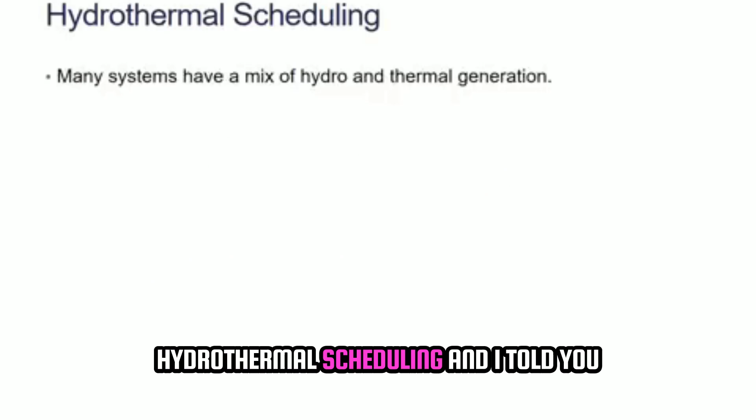So we discussed in the last class about hydrothermal scheduling, and I told you what exactly is the issue, why we want to separately handle hydro generators. So can anybody quickly tell me what all are the issues, or just share your thoughts? May not be all correct, but please try.

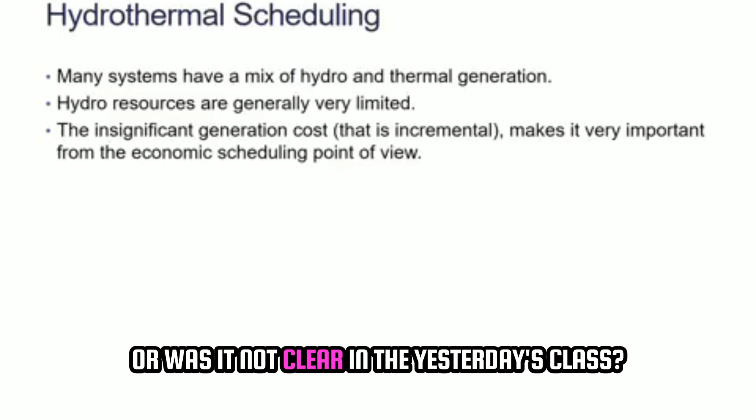Anyone? Let me just see who all are here today. Anyone? Or was it not clear in yesterday's class? Please just make a random attempt, don't worry if you're wrong. Like one of you said about ramping, it's okay, no problem.

Sir, from the point of economic view and also the limitation of hydrogeneration, for that reason we are going to use scheduling based on the limitations of hydro generators. I agree, your point is correct that there are some limitations, some additional factors which we have to consider, but what all are those factors?

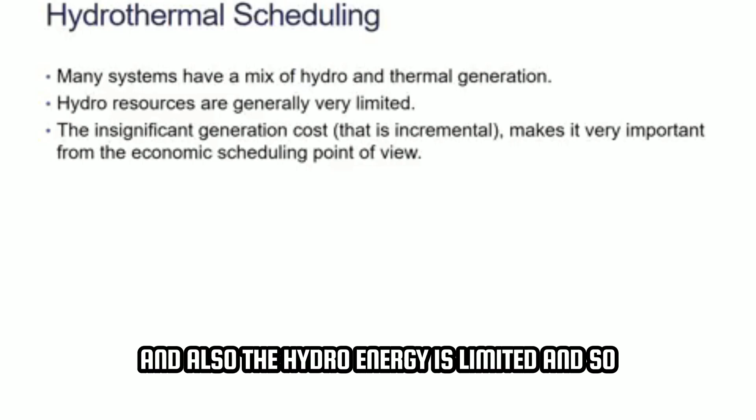Anyone? So the generation of a hydropower plant depends upon many factors such as the water available, and from season to season it also varies. All hydropower plants are not the same; they depend on their location and many other factors. Also, the hydro energy is limited, so you need to think about their coordination and everything.

Yes, partially yes, you are correct. So obviously all hydro generators are not identical, they depend on the location where installed. You can say two coal-based power plants of 500 megawatt capacity can be made identical if the technology is the same. But in hydro, you cannot make two identical power plants because there are multiple factors.

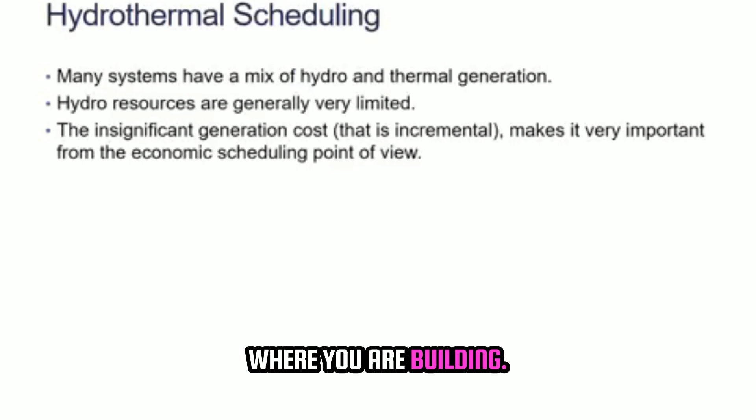One is basically the dam you are building, and all dams in the world have different water storage capabilities. Also, all dams are built on rivers, and all rivers have their own seasonal flow and seasonal volume of water changes based on season. So these factors are there.

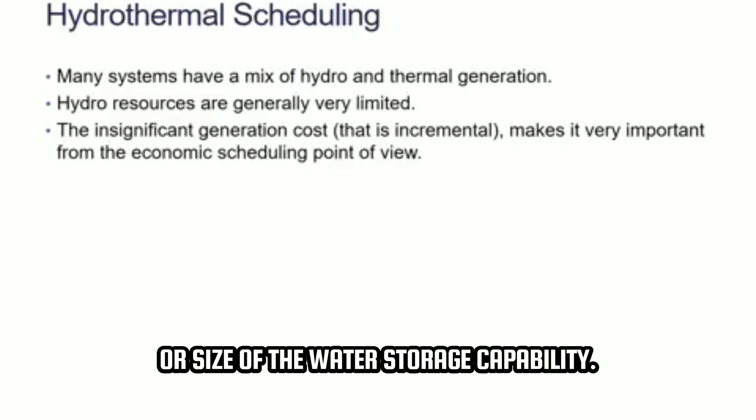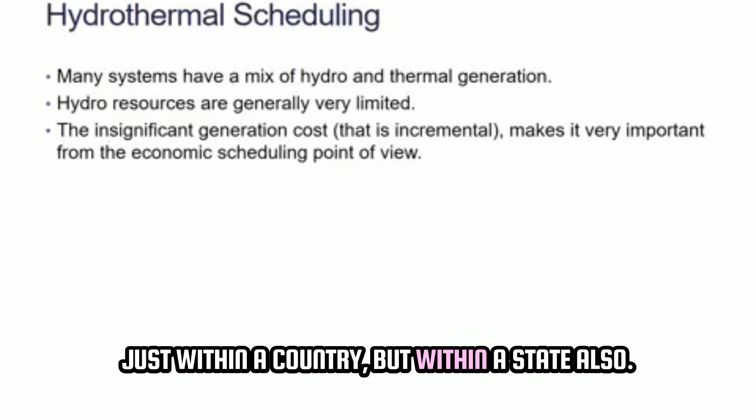Also, the size of the power plant you can build is limited by the size of the dam or water storage capability. It also depends on location because there are regulatory norms, since downstream of the dam there will be cities and agricultural lands needing water for day-to-day activity. Due to government regulations, not just within a country but within a state, a dam built in one state versus another will have different terms and conditions to ensure water supply for the downstream. They cannot block the complete river. So there are various norms because of which they are limited in how much they can generate and at what rate they can generate.

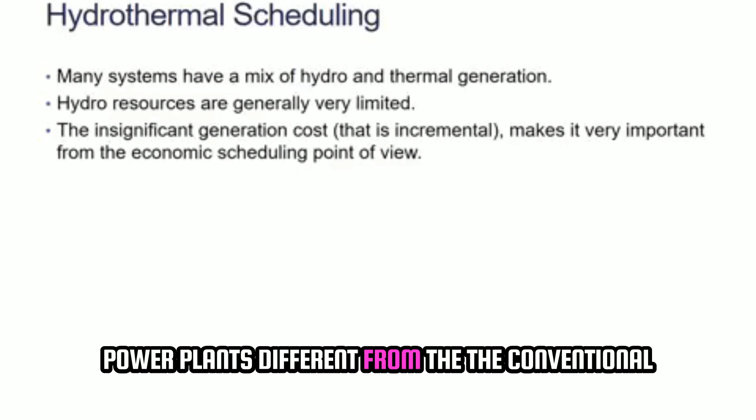So we saw that when a plant has a normal upstream storage, basically there's nothing else—water is coming in, natural storage builds up because of which the dam is filling up, and then you discharge the water and get power generation. This is the conventional way.

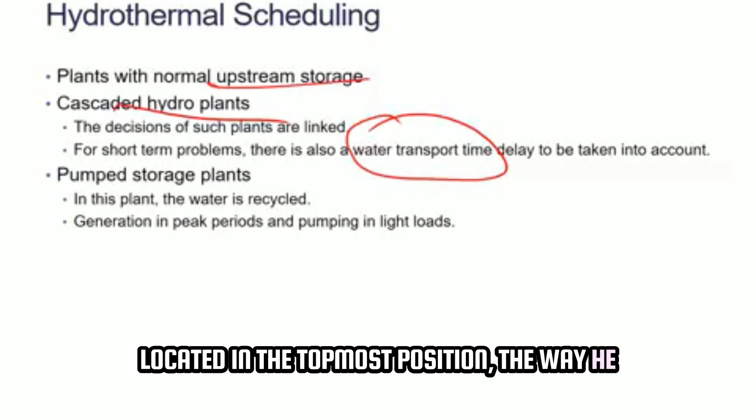Cascaded hydropower plants are there where you need to ensure water transport time delay, because cascaded means there can be a series of dams built on the same river in different locations. So basically, if the dam located in the topmost position releases water in a certain way, then only the dam located downstream can operate based on the operation of the previous dam.

So this connection is there, and it's taken care of by the water transport time delay. You need to ensure that if, let's say, two dams are built on the same river with a distance of 100 kilometers, once the upstream dam discharges the water, the water takes some time to reach the dam located downstream. This time delay also needs to be accounted for when talking about cascaded hydropower plants.

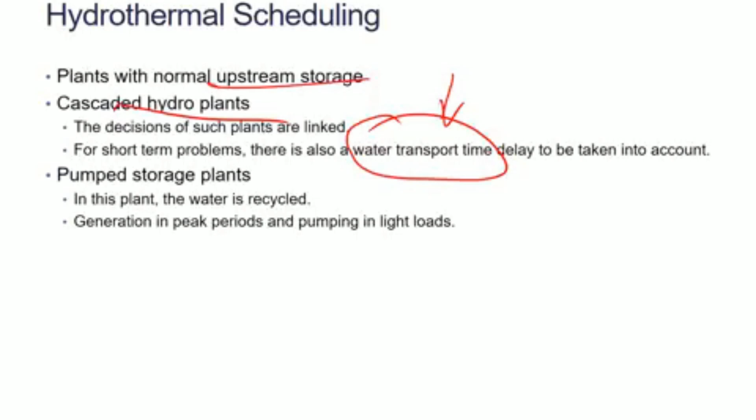And lastly, the pumped storage. Here we discussed that if you have a storage capability, what you can do is generate power when the power prices are very high or loading conditions are very high, then again pump back the water which you are discharging.

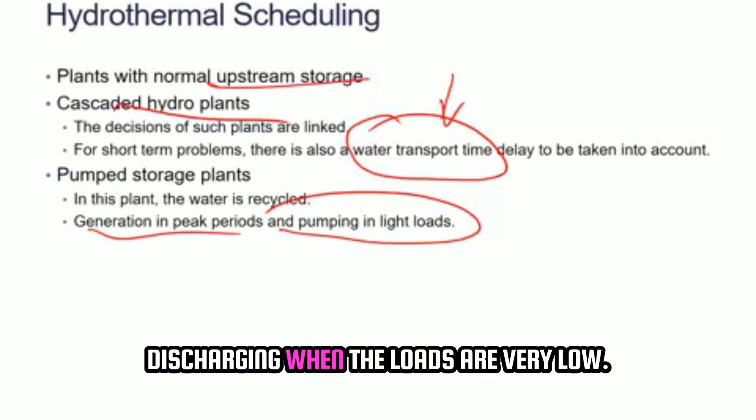When the loads are very low, the prices are very low, so you can pump back the water to the storage area and use it whenever the peak periods are there. So these features are there in some of the power plants—pumped storage plants.

These features make every hydropower plant different from each other, and these specific features need to be handled or taken care of separately in the optimization model or in the OPF. We have to add the constraints very carefully in the optimization model. So I hope now it is clear to everyone why hydro generators have to be handled separately.

Is there any question now? Is there any query now? Because many of you were unable to visualize this. Thanks to Nivedita for answering that.

I hope now it is clear why hydropower plants are handled separately.

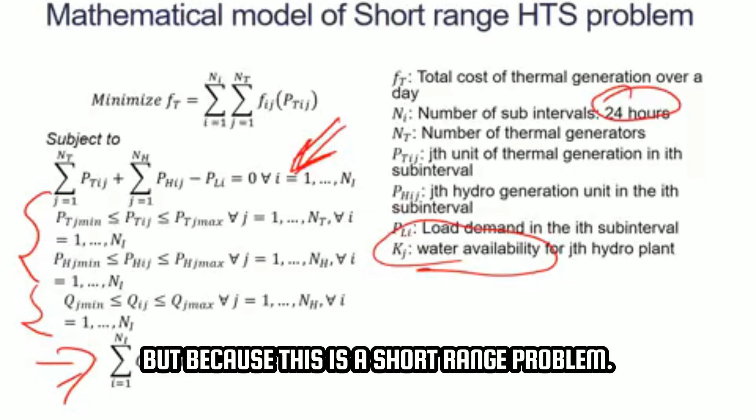Q is the water discharge, the maximum or minimum it can do at a particular time interval, and the total discharge should equal Kj. Kj is the total water available with the hydropower plant, which it can use for power generation for a day, because here we're calculating for a day—we have a 24-hour model, but this is a short range problem. If we're talking about long range, it would be a yearly model. Short range is generally an hourly, daily, or weekly problem.

Right now there is one equation missing here, which is that the discharge is actually equal to A plus B times pH plus C times pH squared. This is the discharge equation which connects these two equations, because obviously discharge can be—you can see here that power generation by hydropower plants can be any value, it is not connected with discharge. So this is the equation which is missing here.

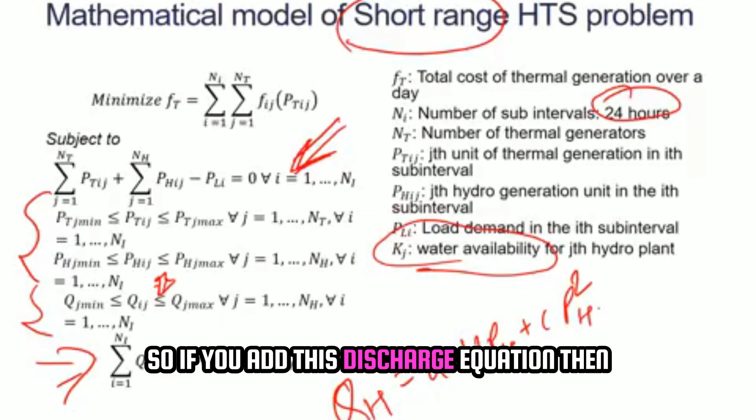So if you add this discharge equation, then you can connect it—the discharge is also limited, or the hydropower generation is also limited by the discharge limits. This is there, which I have discussed in the next slide, but I just wanted to give you an idea here.

So we talked about that for solving this we'll calculate a Lagrange function, and we know that Q is also a function of pH. So basically you can write it like this, that Q is a function of pH, right? Here we are assuming that it's a quadratic function, but it can be any other function. So that's why if we take the KKT conditions, or if we take the derivatives, you will also take the derivative of Q with respect to pH.

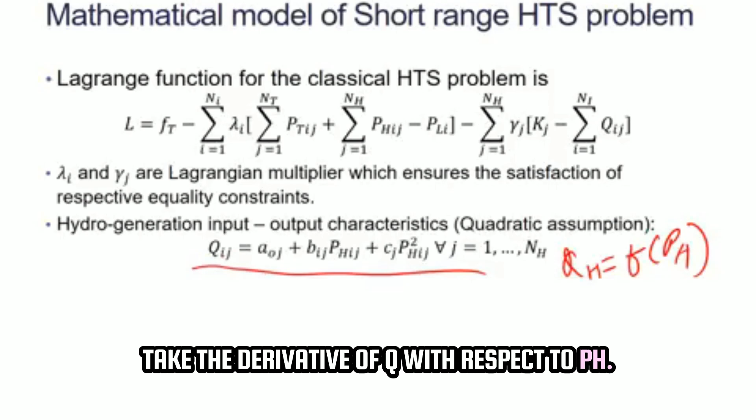Now here we also told earlier that this gamma j is nothing but the price for the volume of the water. So the rate of discharging the volume of water has a price. Although we say that the water does not have any price, from the mathematics you can easily calculate the price at which the water is being discharged. So you can calculate the price of water from here. Right, so this was the recap of the previous lecture.

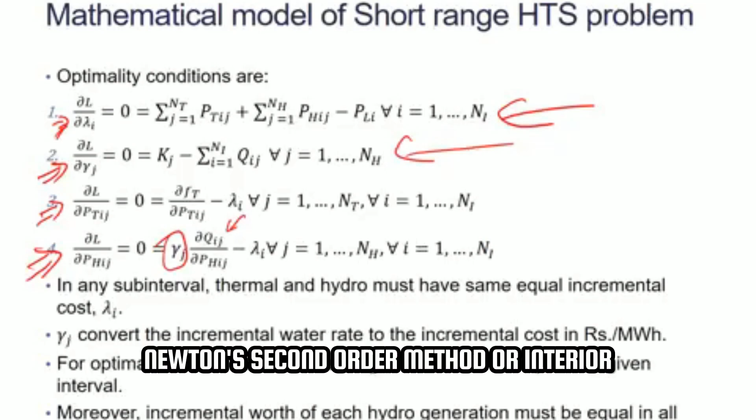Okay, good. If no queries, then we can go ahead. We have seen this type of problem. We can easily solve it using either the lambda iteration method, or Newton's first order method, Newton's second order method, or interior point method, because obviously it's a non-linear one. So you can use any method of your choice to solve this type of problem.

Right, so let me just give a small example for solving this problem using the lambda iteration method. Basically you can assume gamma j for all the hydro generators, and then once you know the gamma j values, you can easily calculate equations 1, 3 and 4. So 1 was corresponding to the power balance equation. So basically only gamma is the unknown compared to economic dispatch. So if you just assume the value of gamma, then the problem becomes similar to the economic dispatch problem.

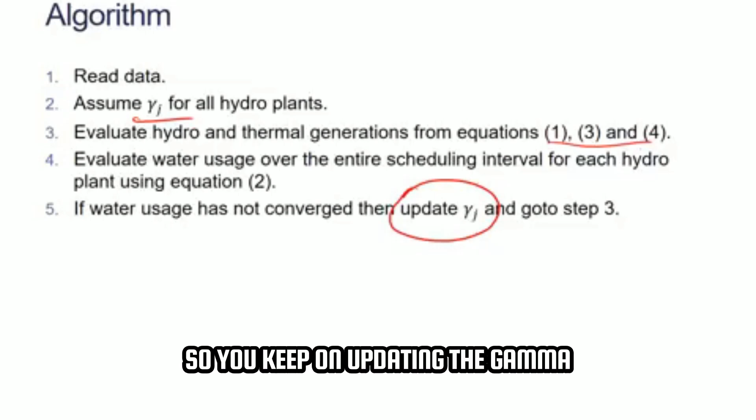So just assume the value of gamma, any random value, and then you can solve the economic dispatch type of problem. And then at the end you update the gamma as we did in Newton's first order method. So you keep on updating the gamma, and eventually it will converge and give you a global or a local optimal solution. Right, so this is what you can do. This is just one suggestion, but you can also solve using Newton's first order, Newton's second order, and interior point method. So you are free to choose those algorithms.

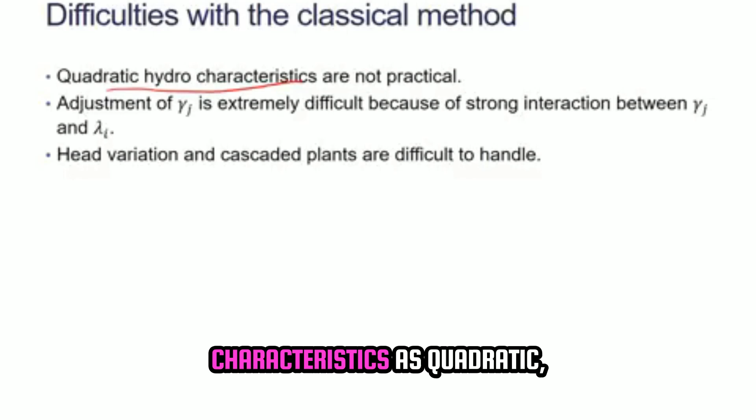Now, obviously, as I mentioned, there are 2-3 difficulties from the practical point of view. One is basically we are assuming the hydro characteristics, Q as a function of PH, as quadratic. As you have seen earlier, we cannot treat it as quadratic. There are a lot of factors which play an important role here. So this is not practical, but theoretically, or even in the industry or practical sense, people use some sort of assumption for estimating these characteristics of hydro plants.

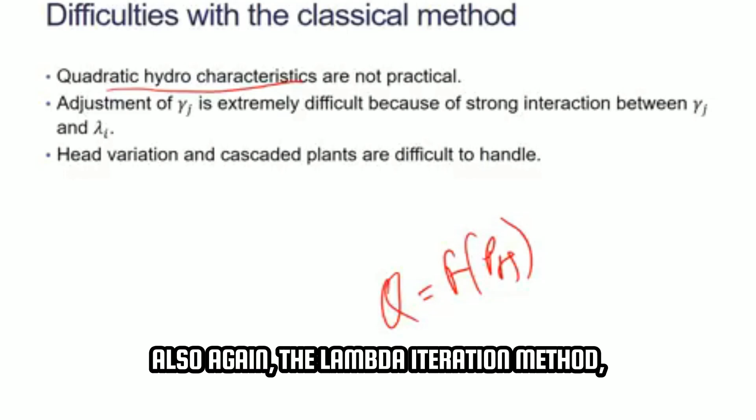Also, again, the lambda iteration method, which I told you before, in that the adjustment of gamma is extremely difficult. So it has a very strong interaction between gamma and lambda, and you cannot easily assume gamma and solve this problem.

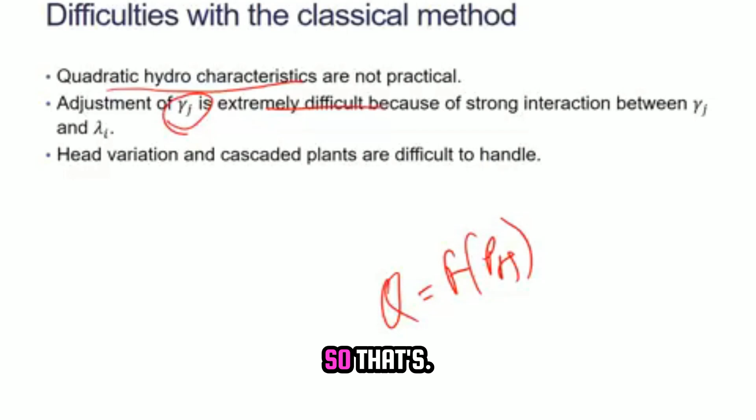So therefore I recommend everyone to please solve it using Newton's first order method or Newton's second order method or the interior point method. Those methods are much easier to solve compared to this lambda iteration method. Obviously in lambda iteration you will require more iterations to converge to a solution.

Also the last, which is very difficult to manage, is the head. You can see that the head is basically the water level at the dam, because based on the value of the head you will have enough potential energy which will be converted into kinetic energy, and the discharge flow of the water will be decided. So the speed of the water will be decided, which will eventually turn the turbine and generate power. So that head is very difficult to decide or predict.

In the case of cascaded plants, the judgment on the head of the dam becomes even more difficult. So there are various difficulties in hydropower plants. Therefore we were studying hydropower plants separately from conventional power plants.

Now I'll give you a quick background on how system operators practically run hydropower plants. The q equation and the discharge equation, that sum of q should be equal to kj, these two equations are not considered by the system operator. I'm just giving you an idea of what exactly a system operator does.

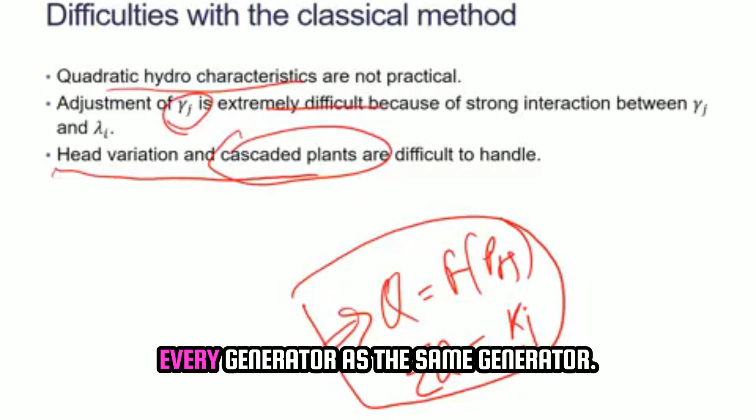They treat all the generators, hydro, thermal, diesel, gas, nuclear, every generator as the same generator. They do not differentiate between them. They collect the bids, similar to what you were seeing in economic dispatch where different generators were giving their bids. So here also they only ask the hydro generator what is the quantum.

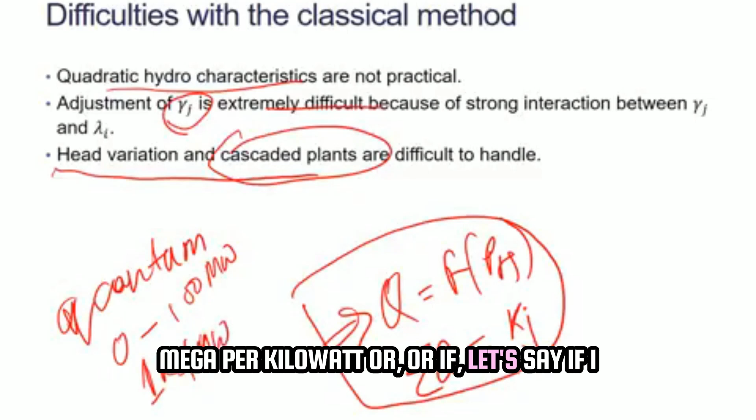Let's say it's a 100 megawatt power plant, so they can say they can generate between 0 to 100 megawatt at, let's say, 1 rupee per kilowatt, or 1000 rupees per megawatt. So these hydro generators are also told to give similar bids, like all the generators in the power system: what range of power they are interested in generating, and at what price. This is decided by individual generators.

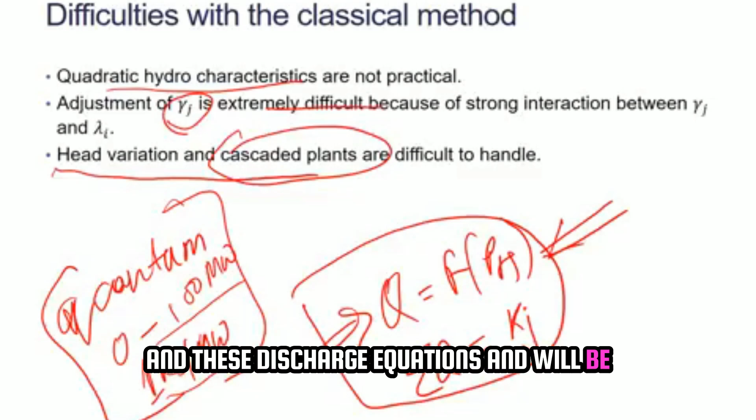Hydro generators provide this information to the system operator, and the discharge equations will be taken care of by the hydro plants themselves. They will ensure these constraints are satisfied. So if a system operator tells them to generate 80 megawatt, the hydropower plants will ensure that their discharge is enough to take care of all these parameters. You got the idea, right?

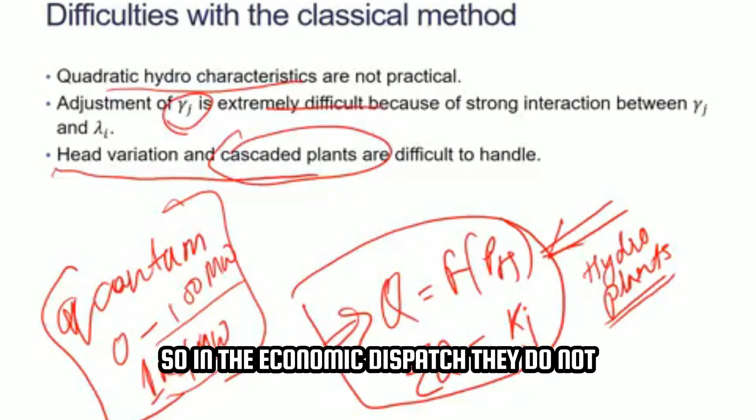So in economic dispatch they do not include these discharge equations at the system operator level, but those equations are included at the power plant level, and the hydropower plant just tells the system operator that they are interested in selling this range of power at this price.

So I hope you got the connection to the practical operational aspect of hydropower plants. It is much simpler in practice, but theoretically much more difficult. That's why they have simplified it in the practical situation. Any queries as of now?

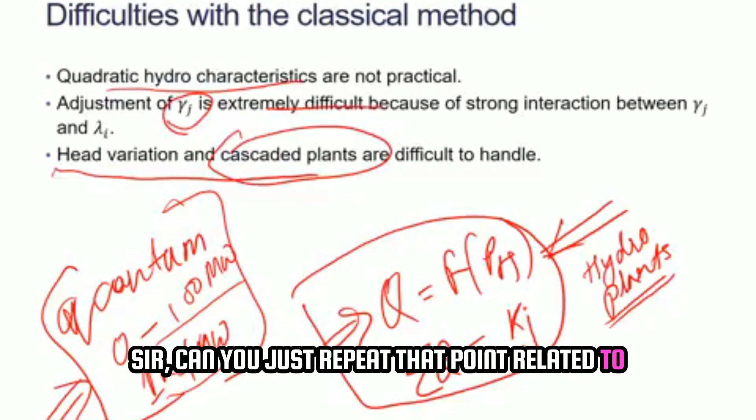Sir, can you just repeat that point related to the price and the megawatt? This quantum one? Yes, exactly. Okay, so basically, whenever a system operator, or let's say in the market, we are going to see that course in detail in the next semester, but just for your understanding, there is a system operator. I'm just going to explain it in a much simpler way.

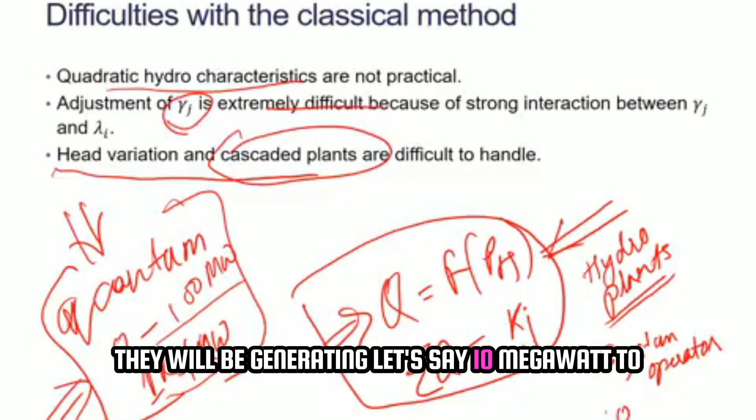So there is a system operator which actually collects all the bids. All the generators, either hydro, thermal, nuclear, gas, diesel, submit a bid to the system operator where they say that they will be generating, let's say, 10 megawatt to 50 megawatt. They can give any value. It is decided by the power plants, and they can say that I'll be generating between 10 to 50 megawatt at, let's say, 0.5 rupees per megawatt, or it will be in kilowatts, but you can convert.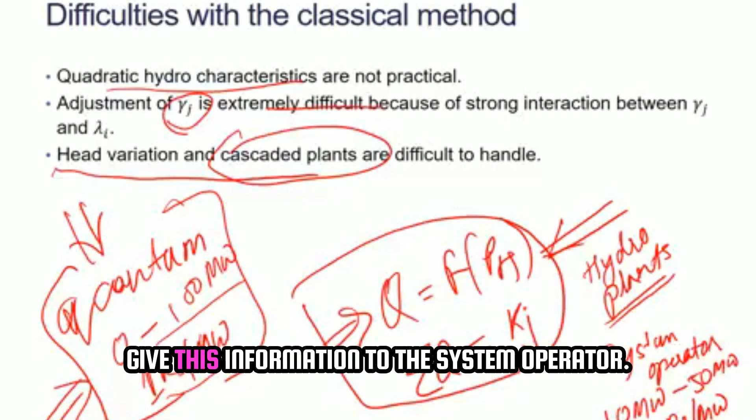Let's make it simpler. I'll convert it and then tell you. So it will be, let's say, 500 rupees per megawatt. So I just multiplied it by 1000, right? So all the generators across the world, in every system operator, in every country, give this information to the system operator: what is the range of power they are interested in generating, and what is the price at which they are interested in selling that power. Based on this, the system operator finds the optimal solution, right?

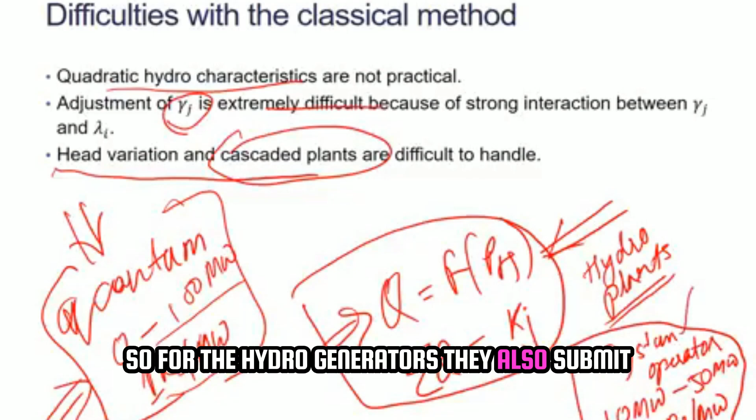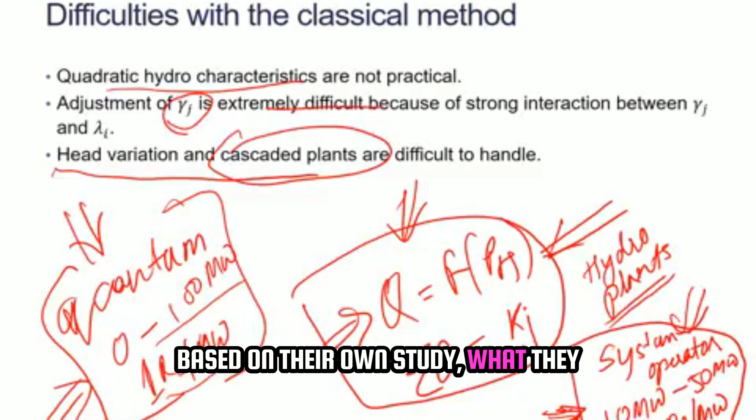So the hydro generators also submit the same information to the system operator, and these discharge related equations are taken care of by the hydropower plants themselves. Hydropower plants do not give the discharge information to the system operator. They do their own study and analysis at the power plant level, find out how much power they can generate at a particular time interval, and tell the system operator: okay, we can generate this much power, based on their own study of the discharge and the water availability.

So the system operator just gets the information about the range of power generation and the price at which they want to sell this power. Right? Is it clear, Adam? Yes, sir. Good, good. Any more queries here?

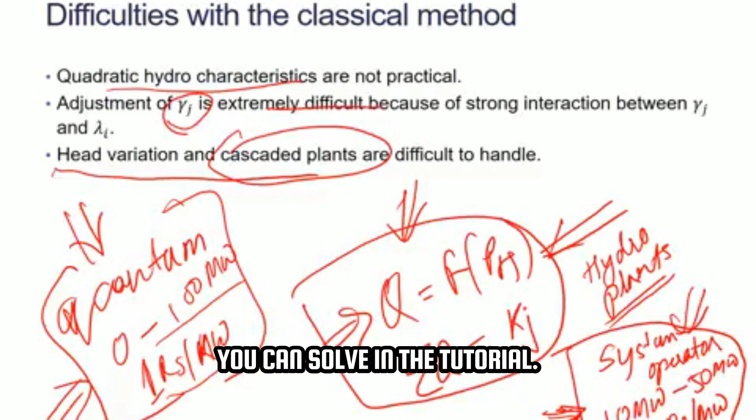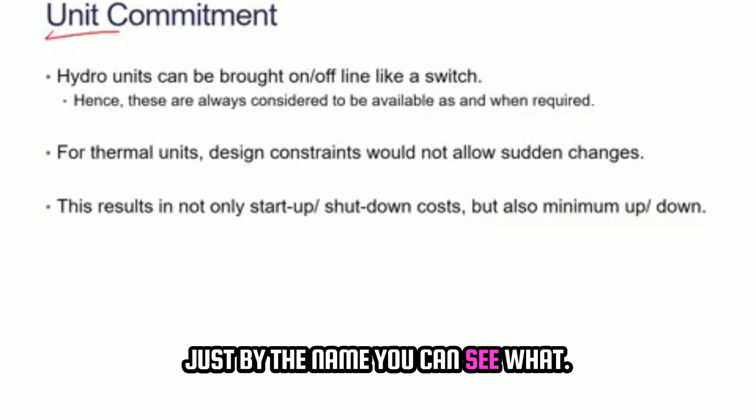Okay, so the new topic we are starting is unit commitment. So anybody has idea on this, or just by the name, what do you understand just by the name unit commitment? Whether the unit will be generating or not. Yes, exactly. It's correct. So just by the name you can see that commitment is there. So commitment of a unit.

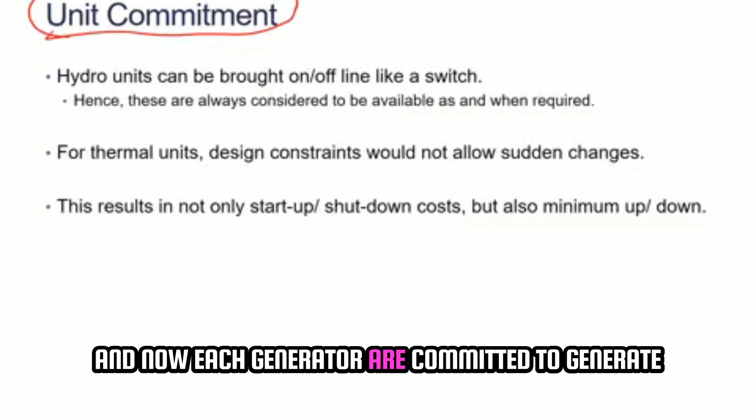A unit means basically in power plant, every generator is a unit. Unit, matlab, in a simple sense, it's a generator, and now each generator is committed to generate a particular value at a particular time interval. So to simply say, you have to tell a generator when to switch on and when to switch off, and when to generate, when not to generate, right?

Now the question will be, why is it different from economic dispatch? Obviously on and off we can do also in the economic dispatch. Why are we studying this unit commitment separately? We can just add the on and off constraints and that can be satisfied in the economic dispatch. Why are we studying separately?

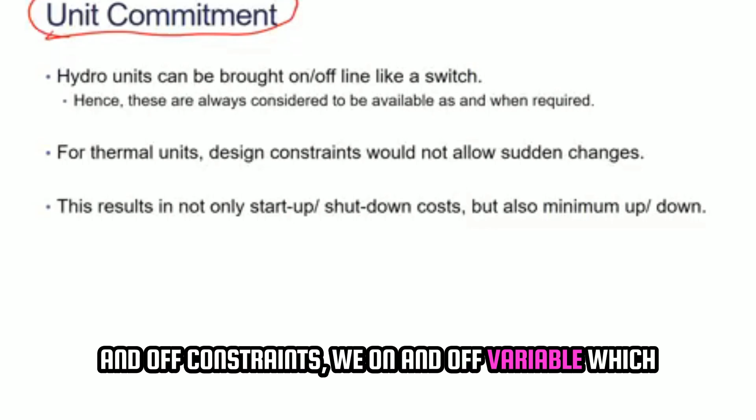So to know the availability of the generation. Okay, availability is fine. Availability, yes, based on the on and off variable which ensures that the generator will be on or off, we can definitely know the availability also, but what else? For forecasting. Forecasting, no, not exactly. We actually assume all the data here. So we assume that we got the data from the forecasting. Is there any limit on the?

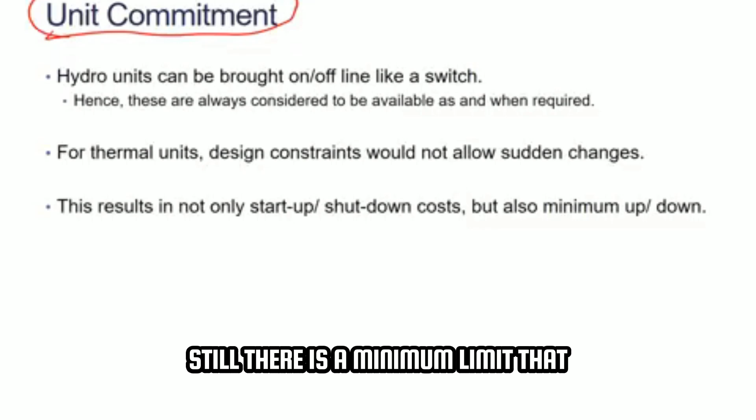Sorry, come again. There's a minimum limit on generation. Minimum limit of what? Sir, on each generating unit, if it's not optimal for us to operate that generating unit at all, still there is a minimum limit, that this amount of megawatt we have to dispatch. Okay. Again, this is all about on and off. I agree on and off is there.

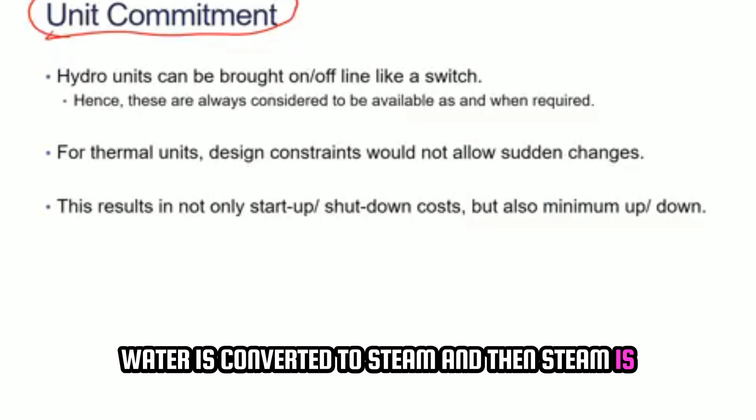Okay, so let me just again explain you this from a practical viewpoint. Take a coal-based power plant, right? So let's assume you have a coal-based power plant, and basically you burn the coal first, then you boil the water, and then water is converted to steam, and then steam is forced into the turbine, and the rotation of the turbine rotates the rotor of the generator and eventually generates the power, right? So this is the complete process of power generation.

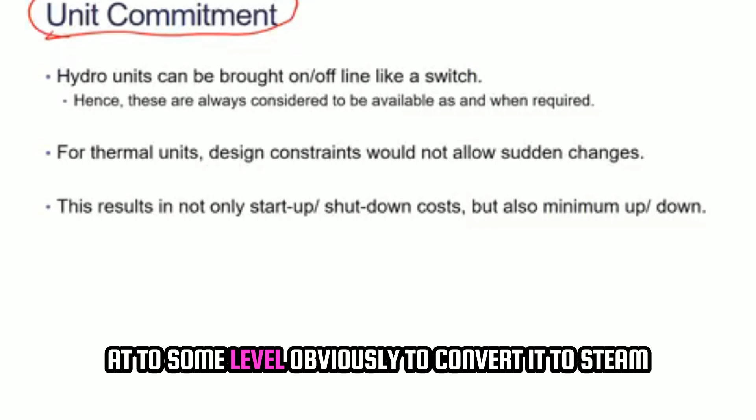Now basically the idea here is that the generator rotating is the extreme end or the last step. Before that, let's assume that the water is at the room temperature or at the normal temperature. So first you have to burn the coal, and then you have to boil the water to some level, obviously, to convert it into steam, and then you start generating power. So once it converts to steam, then obviously you immediately start generating power.

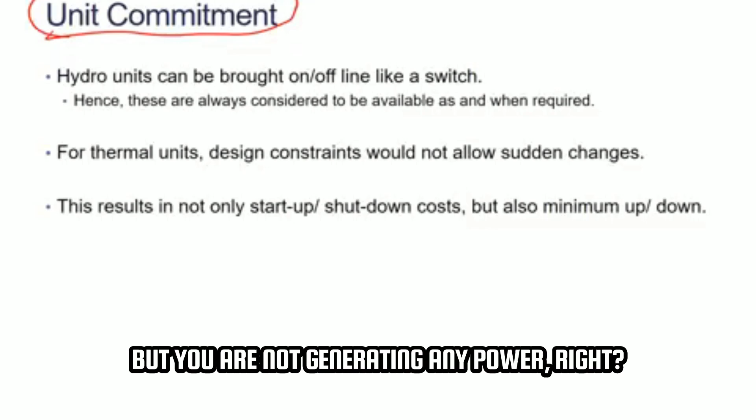Now the question is, during this process where you are boiling the water and converting to the steam, you are still burning some coal, but you are not generating any power, right? So basically, power generation is a business, think in terms of a business. All the power generators are owned by private companies or government companies. They are all running for profits, right? So if there is some raw material which is burning and you are using that raw material, who will pay for that raw material?

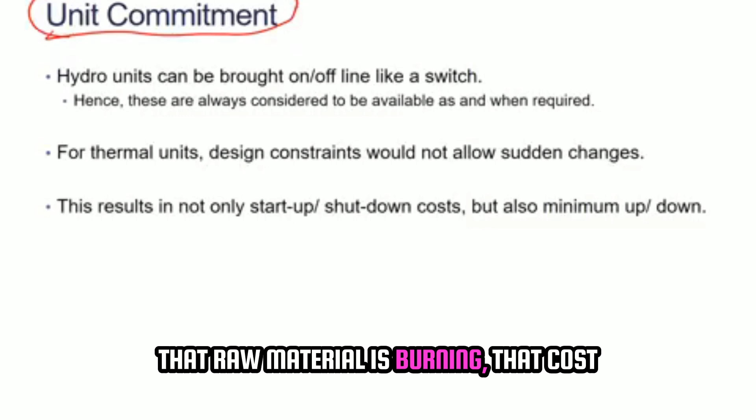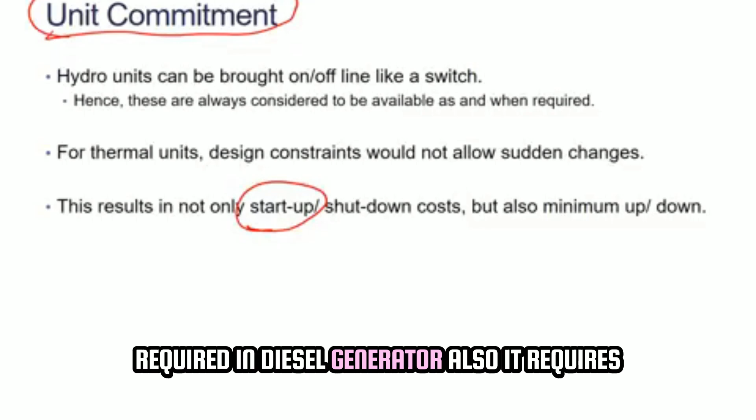Right? So if that raw material is burning, the power plants also require that cost to be recovered, and we have not discussed about that cost in the economic dispatch or in hydrothermal scheduling or in OPF. So in unit commitment, we will be actually considering these startup costs. This type of cost is required in nuclear generators also, in diesel generators, in gas generators, in all the generators except hydro; some startup cost is there in the power plants, right? I'm not sure if you know this or not.

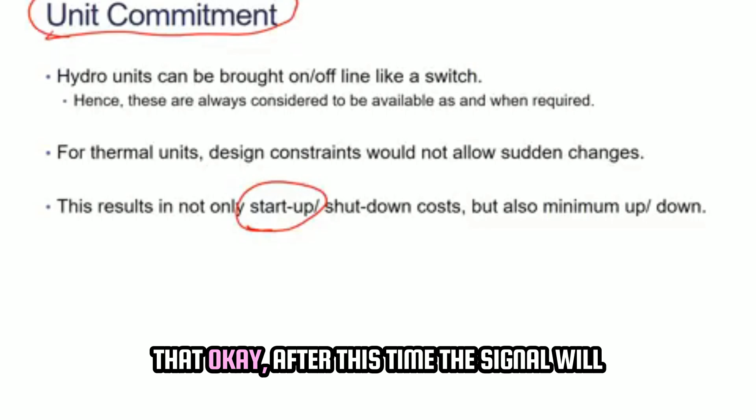Let's say you have two-wheelers. I assume that everybody has a two-wheeler or four-wheeler vehicle. You must have observed or heard the car manufacturers or two-wheeler manufacturers saying that if you're going and you are stopping at a traffic light, and generally these days at traffic lights you will see a countdown timer which tells you that after this time the signal will become green from red, right?

So you must have heard different manufacturers saying that if the time of that traffic light is less than 10 seconds or 15 seconds, then you do not need to switch off your car or your two-wheeler. You can keep it on and just remain 10-15 seconds at stop, and then as soon as it converts to green you can immediately start

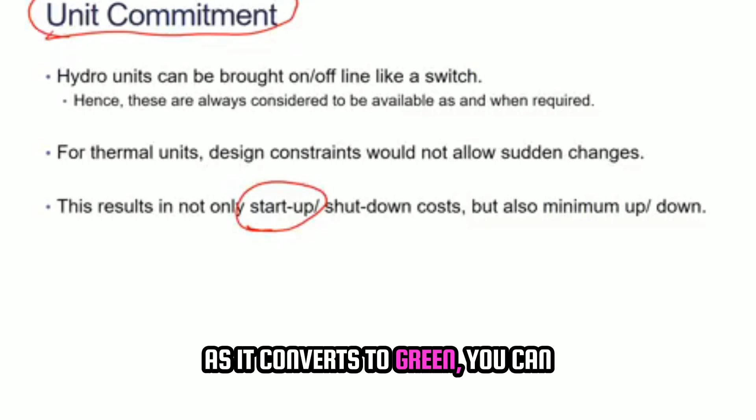running your vehicle. But if the time is more than, let's say, 20 seconds or 25 seconds or 30 seconds, then they say that now you can switch off your vehicle, wait till the time comes to 0, and then switch on and again start running your vehicle. So why are they saying this? Has anybody observed this, or heard this type of sentence before?

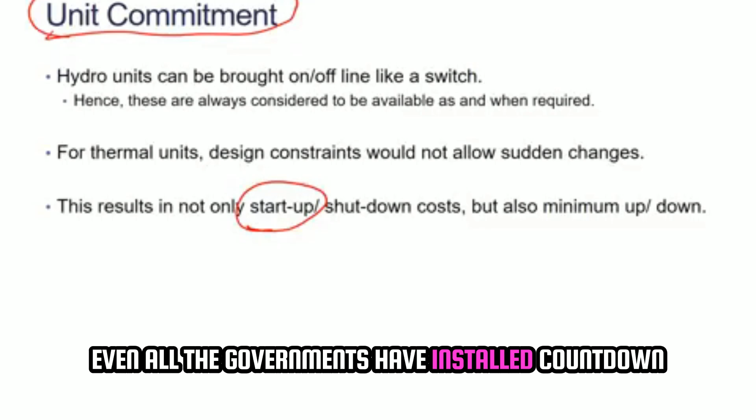Yeah, good. So that was the main reason why all the governments have installed a countdown timer at the traffic signals, because this is the way you can save fuel, as well as save from pollution. Because once you start your vehicle, either a four-wheeler or a two-wheeler, immediately it requires a larger volume of oil than if it is continuously in the on state. So there's a difference between that.

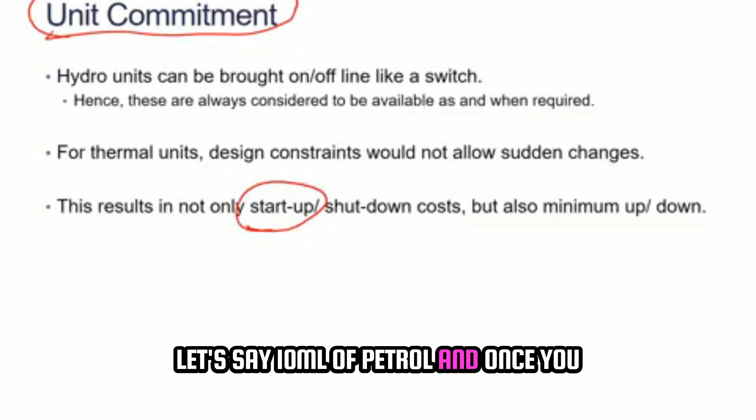So once you switch it on, it might require, let's say, 10 ml of petrol, and once you are continuously running it, it might just require 1 ml for every 10 or 20 seconds. So that is a trade-off. If the traffic light is less than 15 seconds, you can keep it on, but if it is more than 15 seconds, you can switch off and wait for the signal to convert to green, and then you can start. So that is the trade-off.

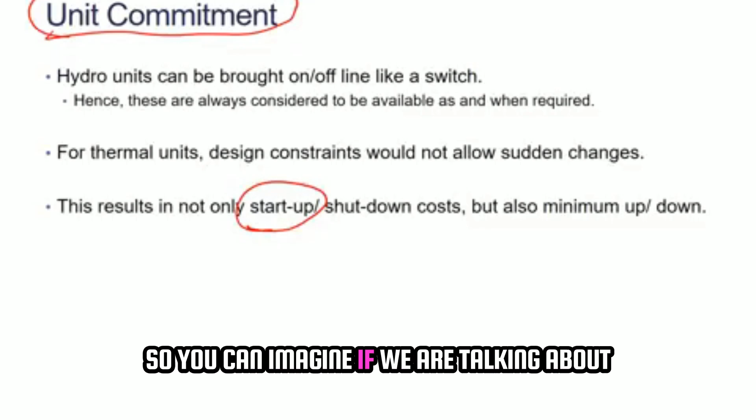So therefore, in the diesel-based generators, even in the gas-based generators, there is some sort of startup consumption, because those generators are of big capacities, huge generators. If we are talking about this small volume for a two-wheeler and four-wheeler, you can imagine the size of thermal generators or the diesel or gas-based generators, and the amount of startup cost they have to face.

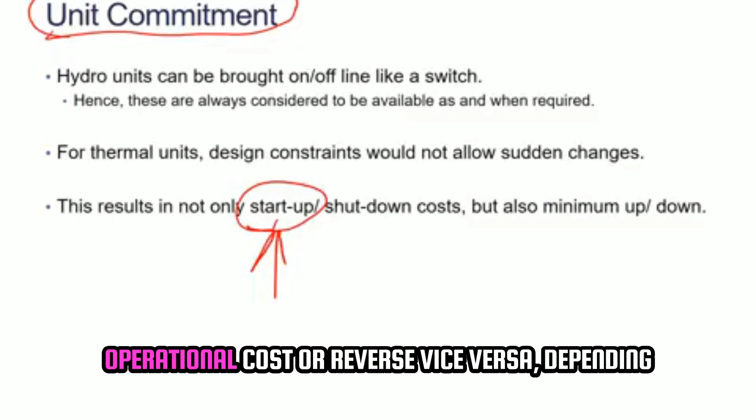So these are the startup costs which are additional in the unit commitment, which we have not discussed earlier. So this is the new thing we are going to discuss, and the optimization will ensure that if the startup cost of a generator is higher and the operational cost is less, it will encourage a generator with a low startup cost and higher operational cost, or vice versa, depending on the situation of the system. So these factors have to be taken care of.

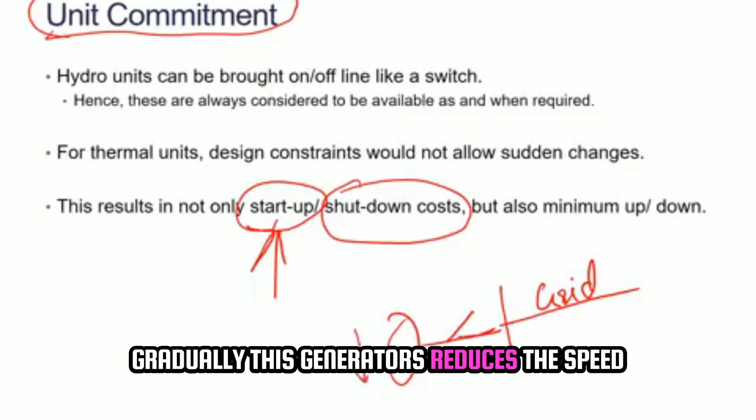Also, once we are talking about the startup cost, there will also be a shutdown cost. Shutdown means a generator is synchronized with the grid, and as soon as we tell the generator to shut down, you just have to desynchronize the generator. If the generator is here and the grid is here, you just have to open this switch, right? Then gradually the generator reduces the speed of the rotor and the turbine.

If it's a coal-based power plant, you can stop burning the coal, but because of the high pressure and high temperature, you cannot immediately stop burning the coal. So there is a whole process where you gradually start reducing the burning of the coal, and then gradually the temperature in the boiler starts reducing. So there's a whole process required in the background once you tell a generator to switch off.

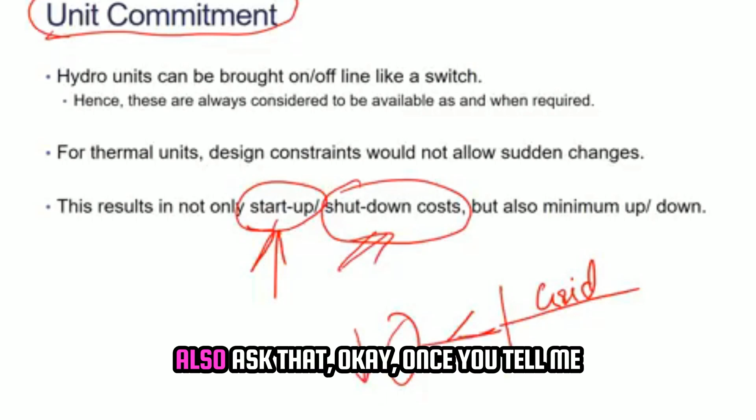Those processes also require some costs, and therefore these generators also ask that once you tell me to shut down, you need to pay me an additional cost, which is a shutdown cost. This is being paid to all the generators, whatever they have asked for.

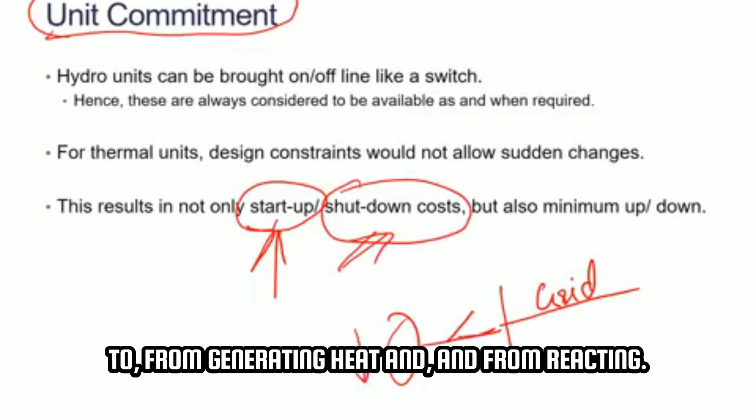You can especially visualize this from nuclear generators. Whenever you tell a nuclear generator to shut down, you have to do a lot of process, because it's a radioactive material, it's a dangerous thing. So there's a lot of precaution, and with a lot of caution, they do a process which will ensure to stop the nuclear reactor from generating heat and from reacting. It's a very careful process which people have to take care of to ensure that you shut down the generator. So these factors are also there, which we are going to discuss in unit commitment.

Also, there is minimum uptime and downtime constraints. These are the time intervals, basically the minimum up and down time.

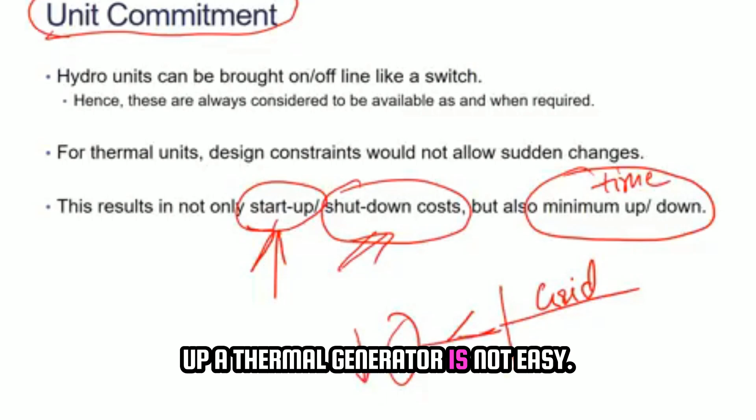What this means is, obviously, this startup cost or the process of starting up a thermal generator is not easy. Let's say, taking you back to the four-wheeler or two-wheeler logic, if you switch on your four-wheeler and go just 100 meters, and then again switch off your vehicle and switch it on again, then it becomes even more uneconomical or inefficient usage of that vehicle, right?

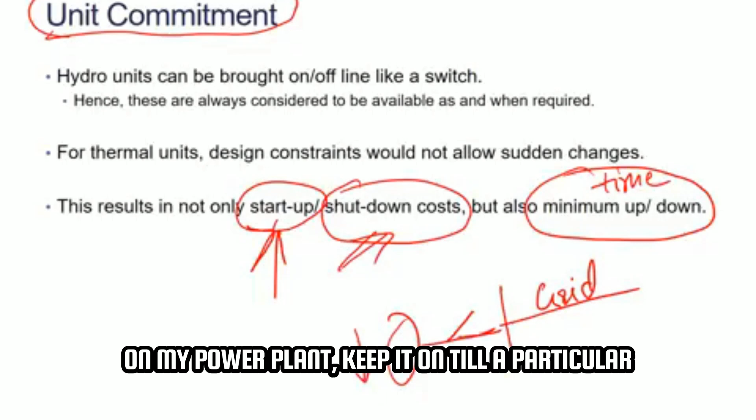So in the same logic, in power plants, they also say that once you switch on my power plant, keep it on till a particular time interval, you cannot tell me to switch off. Generally from the thermal or coal based power plant point of view, they say that if you switch on my generator, keep me switched on for, let's say, 3 hours. So if right now it is 12 p.m. and I switch on that thermal or coal based generator, you can switch me on, but you cannot tell me to switch off till 3 p.m. These type of constraints make the operation of that power plant efficient.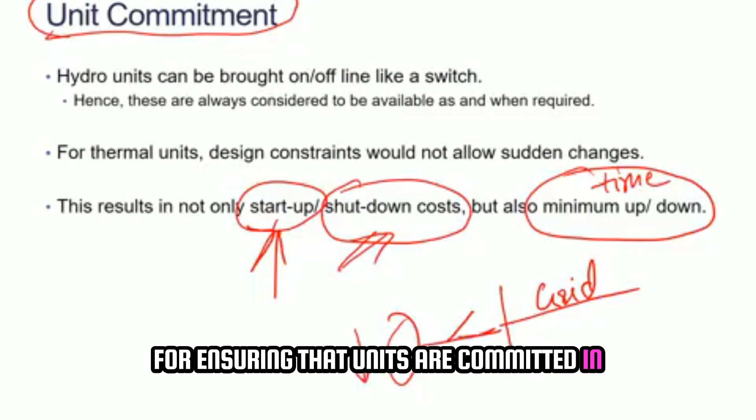These operations or constraints are additionally considered in unit commitment for ensuring that units are committed in an efficient and economical manner. So these time constraints are additionally there, which is called minimum uptime.

Minimum uptime is basically: once you wake me up, keep me awake till this particular time interval, that is minimum uptime. Down is basically you are again going to sleep. So once I sleep, or once you shut down my generator, keep me shut down till this interval. So both constraints are there, up and down, and each has its own requirement. Every power plant has its own requirement on downtime and uptime.

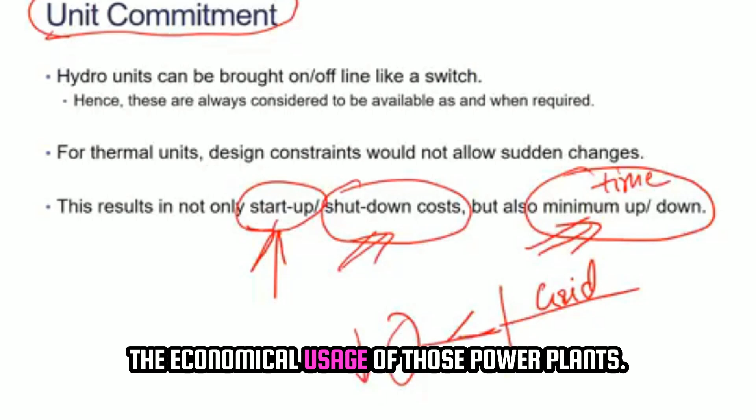The system operator has to ensure this minimum uptime and downtime for the efficient as well as economical usage of those power plants. Otherwise, power plants will face losses. Obviously, as a system operator, he will not face anything.

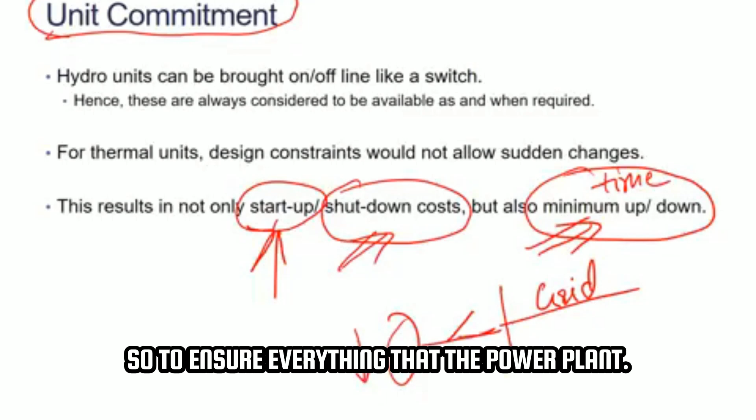Also, in this switching on and off process, there are a lot of switches, pumps, and various knobs in the power plant which you have to control. If you often change all those settings, it creates wear and tear at various levels, and it requires maintenance, or often maintenance will be required for those power plants if you tell them often to switch on and off.

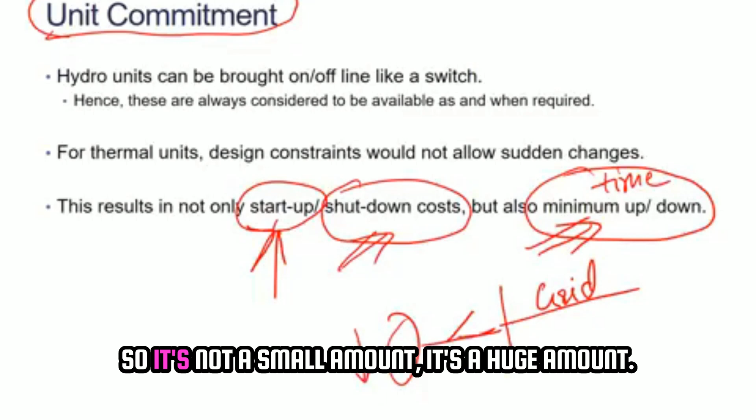To ensure everything works, let me give you a quick example. If you call for maintenance for a power plant, generally for an hour, the power plant loses approximately 10 to 15 lakh rupees just for going on maintenance. So it's not a small amount, it's a huge loss for a power plant owner or businessman running that power plant. Therefore, they have to ensure those factors so that they can run efficiently and economically.

So with this basic startup background of unit commitment, let us see that on Monday. I'll not go ahead because it's already 12 p.m. But I hope you got the basic idea why we are going for unit commitment, and once you start the generator, everything is the same as economic dispatch, DCOPF, or ACOPF. Everything comes after that. First you have to switch on the generator to include it in economic dispatch, DCOPF, or ACOPF.

Right, so this we are going to see in the next class, and we'll see the mathematics of it, how to solve it. There are a lot of different methods to solve this, so let us see all those in the next class on Monday.

Okay, any queries? Yes, sir. Am I audible? Yeah, I can hear you.

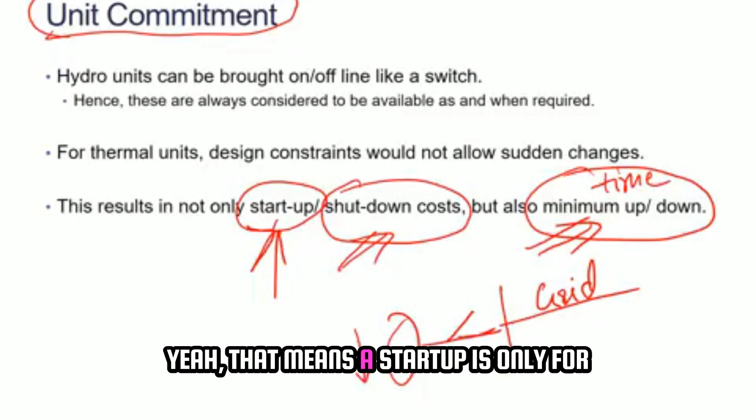I want to ask about startup. It just means a startup is only for load light, or what is called at night. We know that the load will be light, so at that time I don't need to shut down the generators. So I think a startup is only for this period, or there are other cases for that.

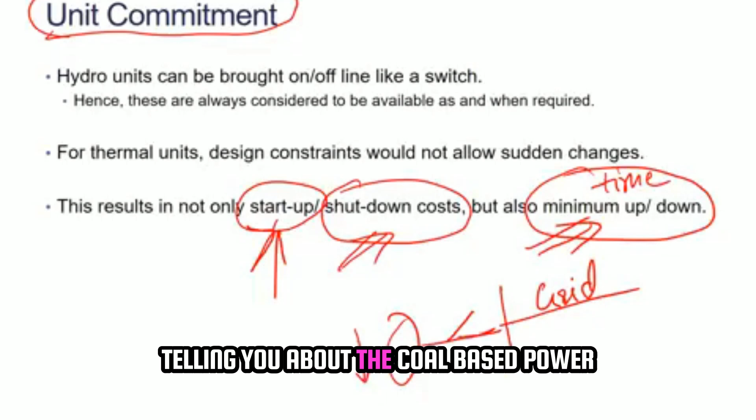No, startup can be at any time interval. Startup cost is not related anywhere to the load. It is not a matter of the load, it is a matter of the generator. So if a generator is requested by the system operator to switch on, then that generator will have to do all the process which I was telling you about for the coal based power plant: you have to burn the coal, you have to boil the water, and then at a particular temperature you start injecting the steam, and once you start injecting the steam, then only the rotor starts rotating and generates power. So this process can actually happen at any time interval of the day. There is no specific time where I can tell you that okay, this time it will happen.

That process involves some cost, and that cost has to be taken care of as a startup cost while starting up, and then the system operator has to pay that cost to these generators. But it can happen at any time interval.

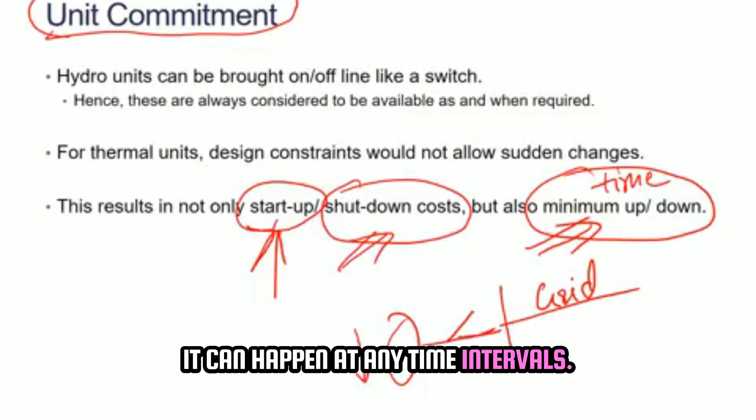Right? Okay, we are going to discuss this in detail in coming up classes.

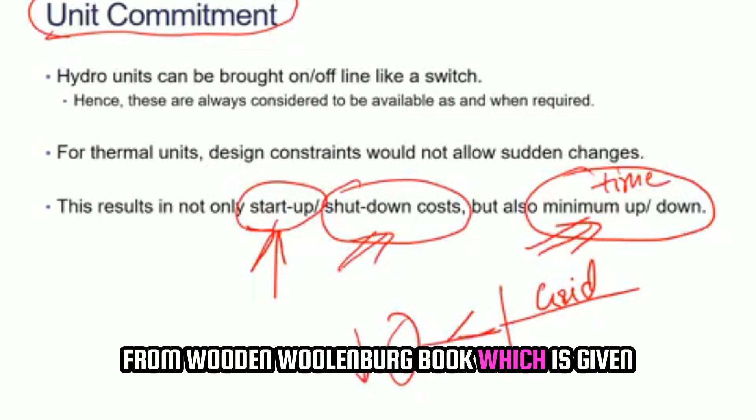Okay sir. You can also read in Wood and Wollenberg book. There are a lot of examples of unit commitment and basic understanding given there. Most of the material I'm taking is all from Wood and Wollenberg book, which is given in your curriculum as a reference. That is the book which I am following the most for all the lectures.

Okay, any more queries? Yeah, I have a question. Yeah, please. Yeah, it's related to generators.

When we are at night and the load will be light, why don't we shut down the generators and start it again? Yeah, no, yeah, you are right.

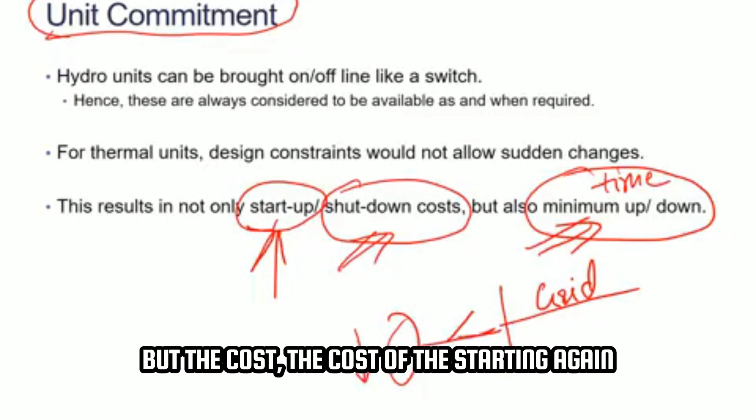Actually, we shut down the generators at night, because obviously at night the loads are very low, because we switch off all the lights. Mostly all the commercial buildings are switched off, all the offices are closed, so most of the loads are off. So obviously at night time the load is very less, but the cost of starting again is more, because the generator needs maybe 3 or 4 hours to start again.

So what they do basically, let's say if the generator has to generate from 7 a.m., let's assume from 7 a.m. he has to start generating. So what he will do is that the system operator will inform the generator at 4 a.m. probably that okay, you have to start generating at 7 a.m., so start preparing the process. So everything is informed to the generator ahead in advance, and they can take those actions. So there is no problem as such.

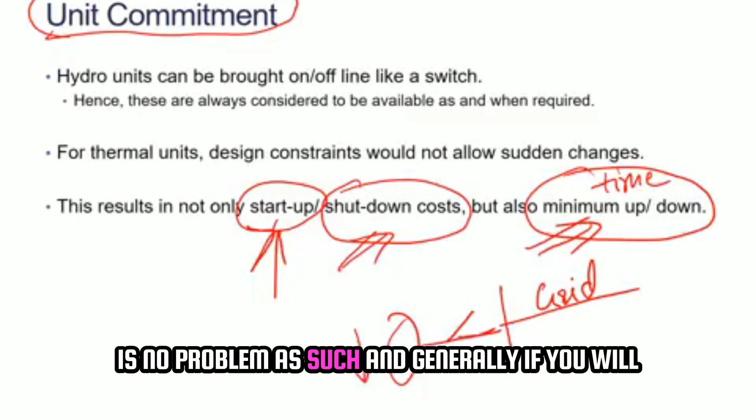And generally, you'll see that obviously startup cost is high, but it is still not so high that it will go beyond the operational cost. So operational costs are less, but operational cost is multiplied over the time duration, while startup cost is paid only once, and that's why it's not very high. It's generally very less, but although it is less, we still have to pay the generators. We cannot avoid those costs.

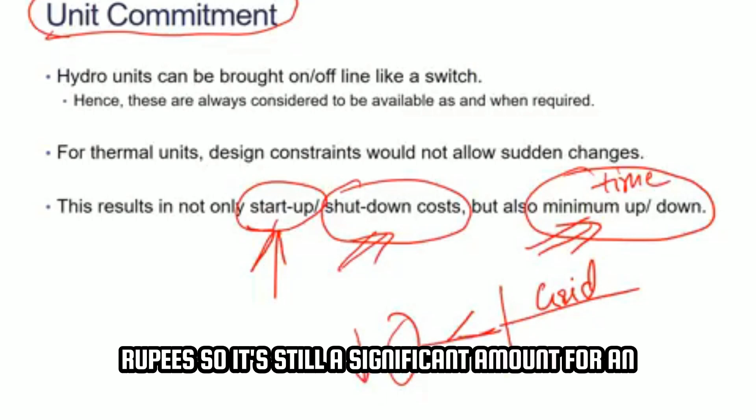And when I say less, I don't mean it is just 1 or 2 rupees. It is still in thousands of rupees. So it's still a significant amount for an individual, but for a system operator it is not that huge an amount.

Right? Okay, sir. Yeah, good. Any more queries? Okay, then.